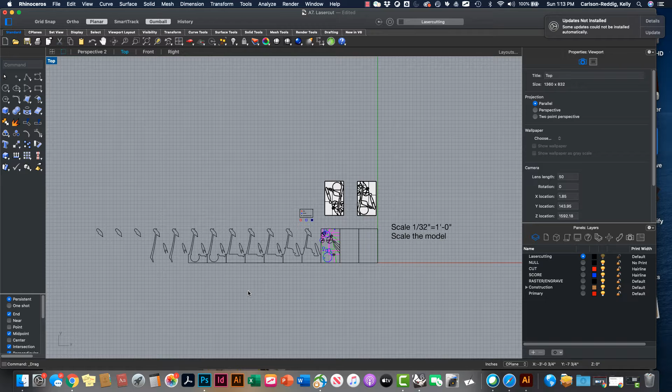So just a couple of things to maybe keep in mind as you are preparing your files for the laser cutter. The first is that we're going to use the contour feature, the contour command, in order to create a set of slices through our model. And we want those slices to be at 1/8 of an inch, or what is equivalent to 1/8 of an inch, at the 1/32nd of an inch scale.

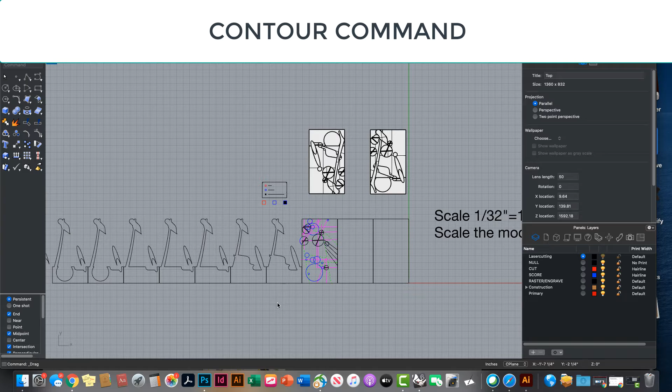So if you were working with your models when they are still 300 feet long, you're going to offset those by 4 feet. But I am also going to want you to maybe look back to some of your other drawings that may not be kind of in your model anymore. And I'm thinking particularly the tertiary.

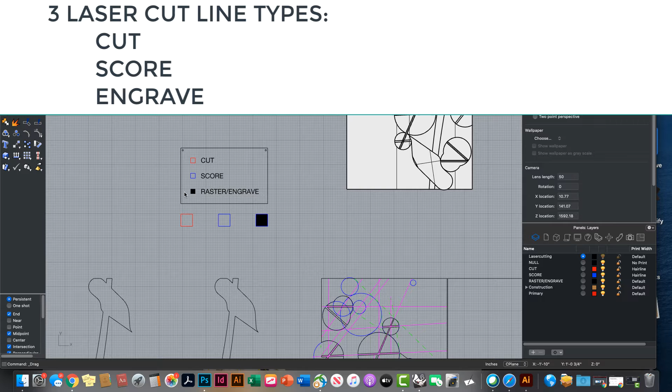I have pulled in each of the layers from the laser cutter template that they've provided at the SOA shop. And so in preparing these files, we're going to want to place the lines on one of 3 layers: the cut, the score, or the raster engrave layers. And I am going to primarily be using the cut tool to cut the profiles.

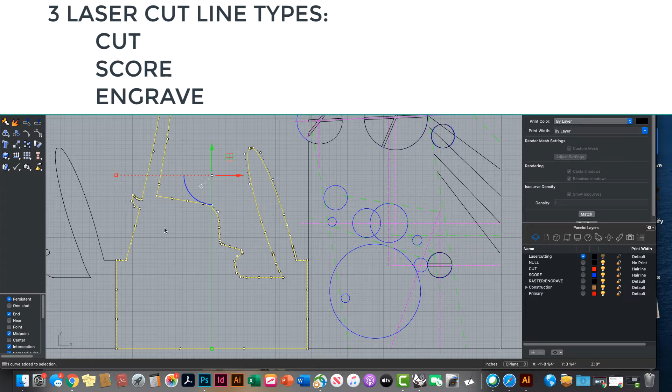I've prepared all of the profiles, and I've also offset them just the littlest bit. It's not really worth the time that it takes to set them exactly next to each other and then have to remove the different lines. And also this way you can set up each of these profiles as a line, and the laser cutter will work much more efficiently. So those will be my cut lines. And then I would like for you just to create maybe one image using the raster engrave hatching. So that's how you're going to prepare this.

We also need to scale. If you are still at a 300-foot long site, we're going to need to scale it twice. And if you think about it, the scale 1/32nd of an inch equals 1 foot 0 inches. We're in 2 different units there. We're in inches and feet. And so you could scale using a 32nd, right? But that would still only get you to an inch equals a foot. So in essence, you're having to scale twice.

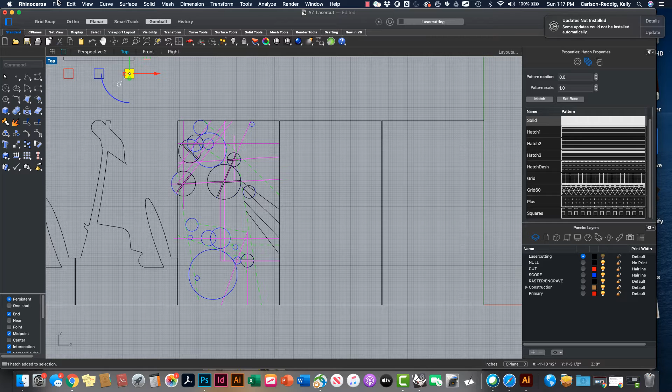You can either scale at the equivalent of 32 times 12, or you can scale 1/32nd and then scale the 1/12. The other way to do it, which is a little bit of a shortcut, is right now our model units are in feet. And if I simply change into inches, it will give me the option to scale. And if I refuse that scale, it will actually shrink my objects. Everything that was 1 foot will become 1 inch. So my 300 feet become 300 inches, and then I can simply divide that by 32. So I hope that that's clear.

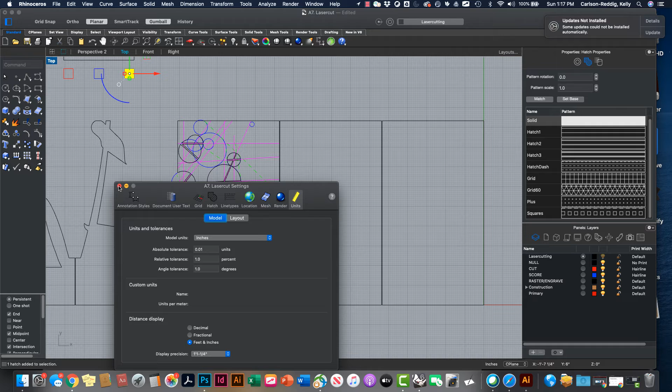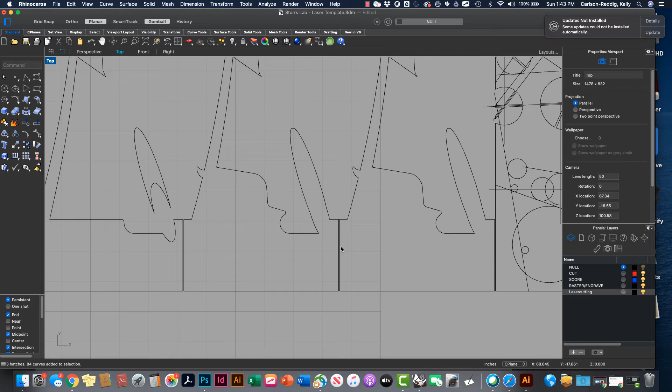So in any case, I would like for you to have some lines that are scored, some lines that are engraved, and some lines that are cut in your laser cut model. So for clarity, I just kept all of these objects kind of in the position, but I do want you to see I've left a space between all of them. So even though there's a little bit of material waste, hardly any, we can have sort of 2 clean lines right next to each other, and it'll be a little bit easier to edit ultimately all of these layers.

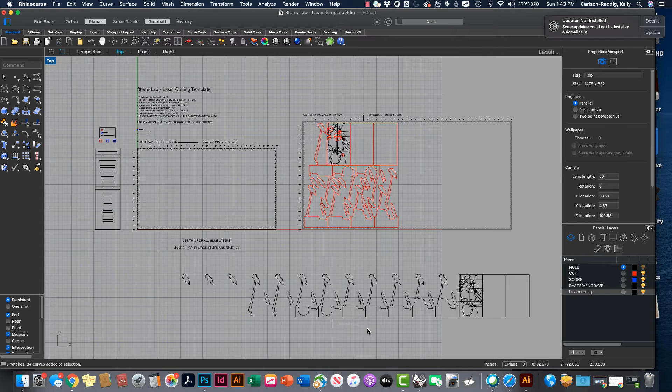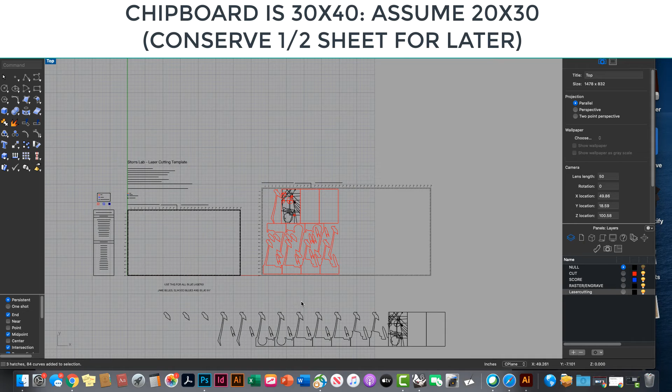You'll want to open up the SOA template, and I've given you the link in the assignment. And we have 2 different sizes of laser cutters. Given the size of our pieces and the size of the board which I've gotten for you, you will want to use the larger of the 2 laser cutters. But as you kind of go in and adjust your pieces, you can lay them out so that you really don't end up needing the entire bed. You can make good use, efficient use of your piece of chipboard. So I'm going to check the size of that chipboard for you, and I'll put that in the assignment.

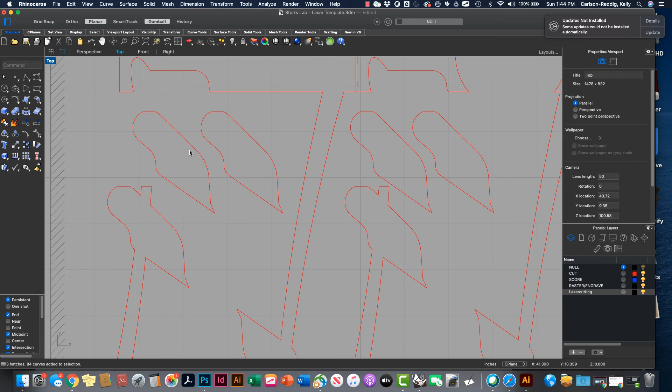But you'll see I've kept some of my objects sort of in line, and I've rotated others. You don't want to flip them. Actually, I guess it's probably not a big deal if you do, but you can sort of easily utilize the space in between. And I need several figures of this shape, several editions, so I've just kind of put them in where I could fit them, and I have this sort of convenient nesting of these 2 figures, so that worked pretty well.

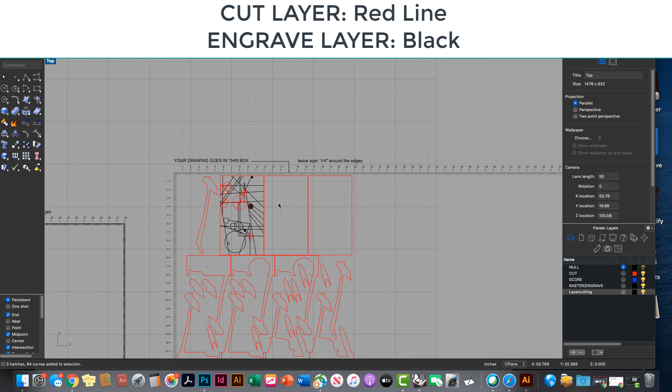And I do have the data split onto a cut layer and the raster engrave layer so that I can register the map on my last kind of flat contour and keep that drawing. And you'll also see that on that layer, I'm going to cut through. I'll have some holes, and where this falls out, I will not have that line, but it will pick up again on the other side of that hole. But you'll see I have a combination of holes cut through and pattern essentially etched on top.